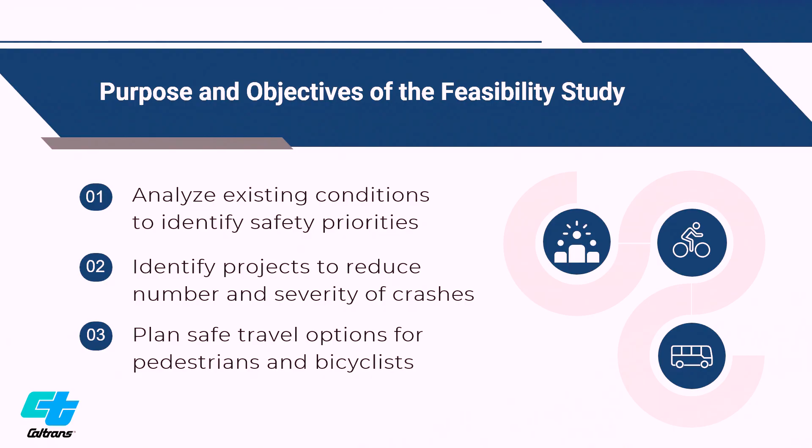The study area is the full length of PCH within Malibu, and we have done crash analysis. After we did a series of workshops, we've done some crash analysis because we want to understand what's going on out there. We can see from this that the highest number of crash factors is improper turns.

Speeding is a crash factor, and speeding is an issue across the board. For the many people we spoke with, speeding seems to be the number one thing everybody agrees upon, that we have to find a way to slow the cars down to a reasonable level out there.

Other violations include failure to yield, following too close, alcohol influence is another crash factor, something other than improper driving. As far as primary crash type, rear end is number one, then side swipe, broadside, somebody hitting an object, head-on crashes, auto hitting pedestrian, overturned, and some other things as well.

Looking at these crash factors, in some of the situations we are aware of, people are making U-turns in places that they shouldn't be making U-turns. Pedestrians park on one side of the street and cross to the other side. People pull out of side roads and turn left across traffic. People come to side roads and turn right where the visibility is poor.

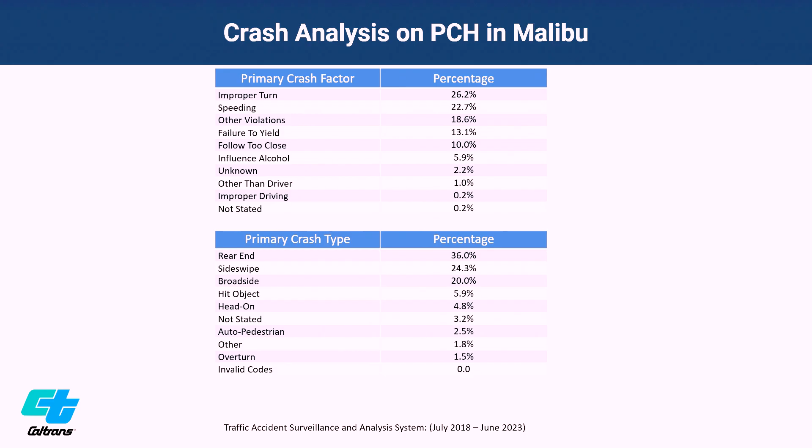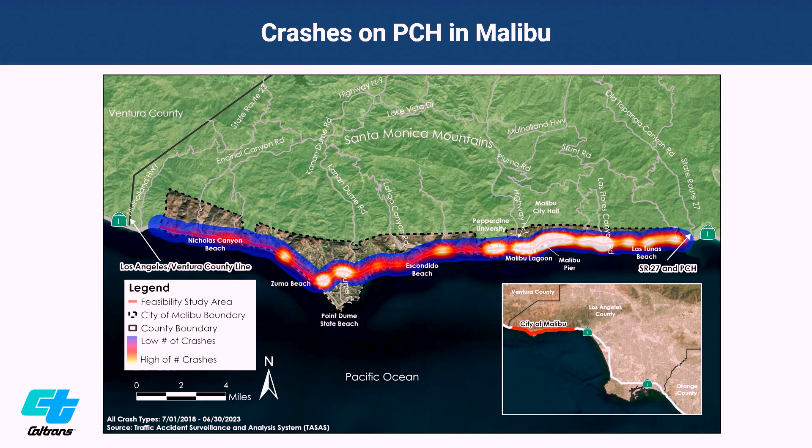This map kind of shows you the concentration. You see a lot of concentration out there, especially between Las Flores and all the way to the pier, but also some in the Kanan Dume, Heathercliff area, and quite a few down there by Bonsall and Westward Beach. So these are the areas that we understand need the most attention.

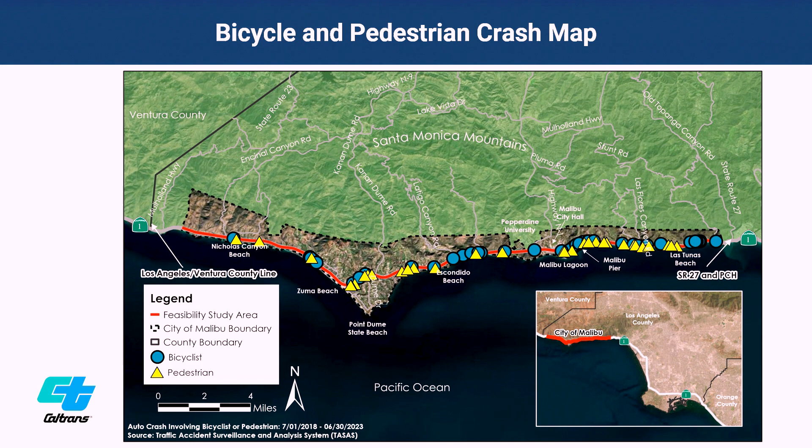We're looking at bicycle and pedestrian crashes and where those have occurred. So again, in order to make things safer, we need to understand the problem to apply the right remedy. And as far as our process goes, it's collecting information.

Engagement is what we're doing tonight, making sure that we understand what people, all the stakeholders, want. The analysis is ongoing, again this crash analysis. We've spent some time out in the field looking at the highway and looking at the conditions and what we might be able to do to help remedy some of that.

We're now developing project concepts, and that's what you're going to be doing tonight. So that's going to be really important. Then we'll come back later on, November, December-ish, with a draft report. So it's a pretty compressed timeline. But we're doing what we can, and tonight is, again, a really important milestone in how we move forward to the next step and prepare that draft and final study.

Our engagement has a four-pronged approach. We started off with the community charrette back in July 11th. We're doing these workshops, we have surveys online, which, by the way, this QR code takes you directly to, and an interactive website. We've also done a number of stakeholder meetings, and those have been really important as well.

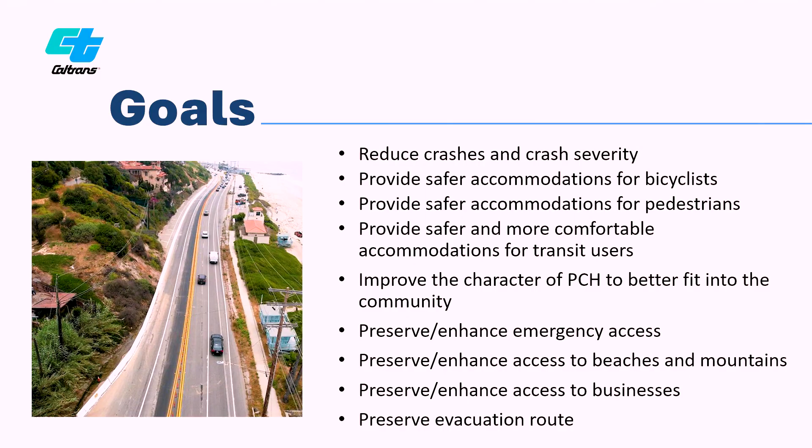Now, the next thing I want to talk about is the stakeholder meetings. These are the people we've met with - the local residents. As I go through these, I'd like you to raise your hand if you are one of these. Local residents - okay, a lot of you, most of you, local residents. City staff.

California Highway Patrol - thank you. Los Angeles County Sheriff - all right, thanks for coming. County Fire Department - anybody from the fire department make it today? Okay, Coastal Commission. Mountains Recreation and Conservancy Authority - okay, nobody there. Malibu Pacific Palisades Chamber of Commerce. Streets for All and Streets Are For Everyone - I don't see... oh okay, Damon, you made it.

Okay, these are all legitimate stakeholders, and they all have different perspectives on things. The sheriffs, CHP, fire department - they want emergency access. Mountains Recreation Conservancy Authority - they want parking on the beaches, near the highway, so people can get to the beaches and trailheads. Some people don't want parking. We need to find space for bike lanes and pedestrian access. That is not going to be easy to take all these things, and we've got limited space. This is all about budgeting space.

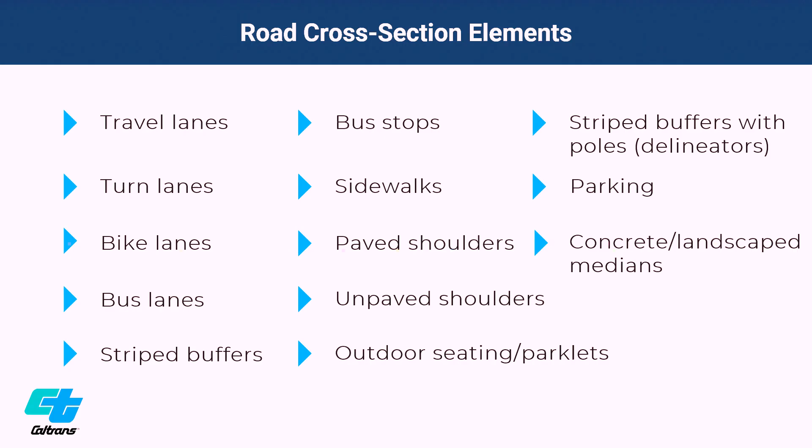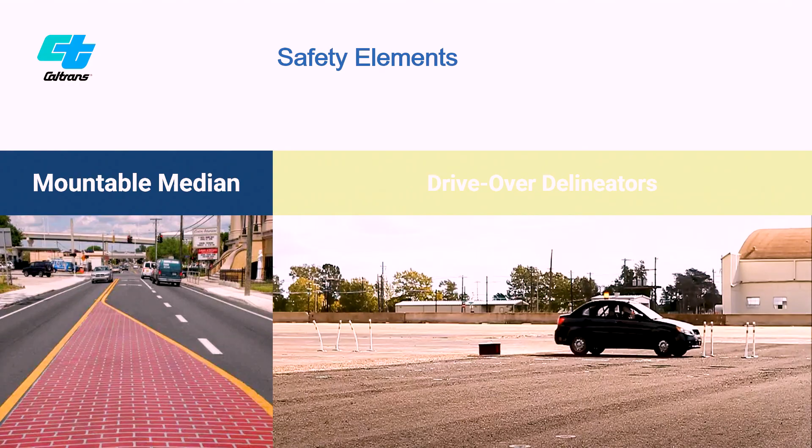One of the things we've been thinking about are medians. This has come up where we replace the turn lane in some places with a median and have U-turns upstream somewhere, so people can turn around if they need to access something on the other side. One thing we've looked at is a mountable median, so the fire department, sheriff, and CHP can still get through—maybe a median they can straddle. So we're looking at different options, and the median with the U-turn is a possible tool we could use in some places.

Now we're going to get into the cross sections, and I'm going to go through all of them. Then once we've gone through all of them, I'm going to have you come up and look at each of these tables with all these cross sections in them. So that's type 1 over there, 2, 3, 4, and 5.

This first type is 4 lanes, center turn lane, housing on both sides. There are different places that have this typology, but one that really exemplifies this is Las Flores Canyon Road to Carbon Canyon Road.

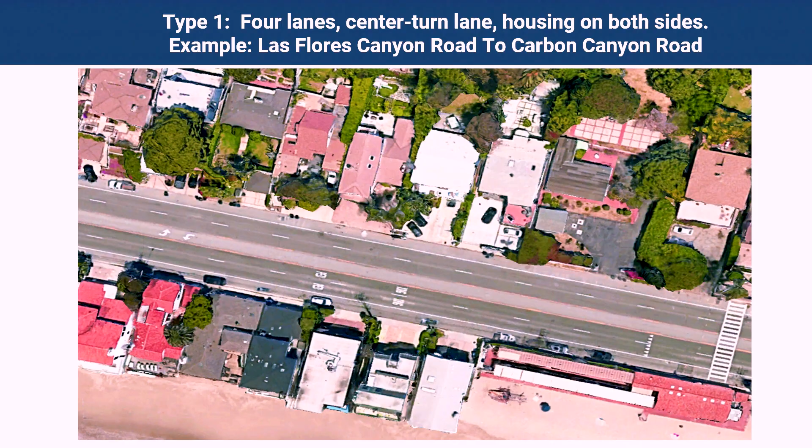By the way, when we did our survey and the workshop last time, we asked people some of these same questions—of all the cross-sectional elements, what do you want to preserve most? We see here on this stretch, and it was actually pretty similar on all the stretches...

Bike lanes came out number 1. Sidewalks or walking areas came out number 2. Bus stop improvements, number 3. Full or part-time bus lanes was next. Then replacing the center turn lane with legal U-turns at signalized intersections, then center medians. Parking on the beach side was later on, and maintain the same number of travel lanes ranked pretty low, as did parking on the mountainside. Keep the center turn lane ranked almost at the bottom.

Dead last was 'I want the highway to stay the same as it is now.' That is not what we heard many people at all say that they wanted. So this means we need to find some changes. Which of these cross sections best suits that?

So this first stretch again—housing on both sides, Carbon Canyon to Las Flores. This first possibility, and by the way these aren't the only possibilities, but these are some mixes that illustrate it. When you vote, you're going to tell us which of these you prefer, and you're going to rank them.

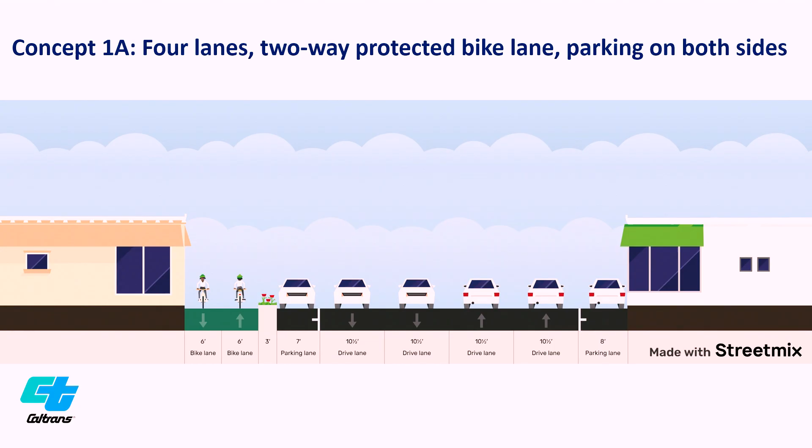Well, yes, so this would be two-way bike lane, and you see parking on both sides in this scenario. Right, so this one is parking on one side, same thing, and sidewalk on one side. Add sidewalk. Yes.

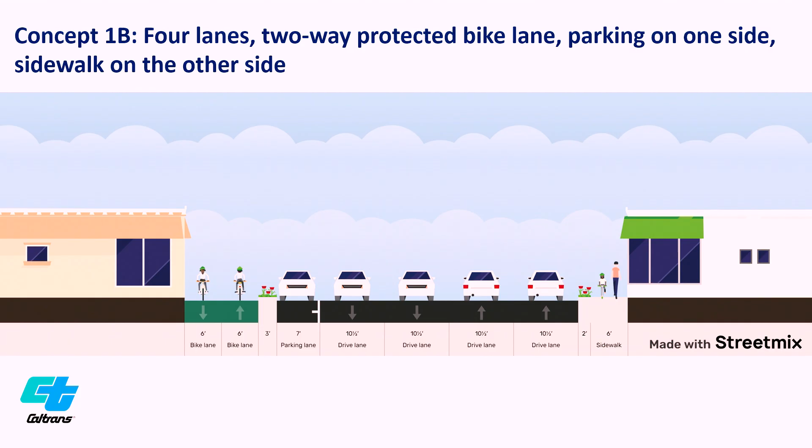Yeah, thank you, and I really appreciate you guys coming and struggling with this because we've all struggled with it for years. But when we look at your survey, the number one thing is bike lanes, and it's very clear that the bike lobby has taken over the survey. I've come to 2 city meetings from Rambla Pacifico today on the Coast Highway, this one and one previous. I saw one cyclist on the highway. There's a lot more on the weekends, they're recreational, yet they've skewed the results terribly. What do we have, 50, 60 people here, maybe 35 residents. They're going to feel very differently than what your survey says.

And one thing you didn't seem to have, that's critical, how are we going to narrow lanes in any of these options? Almost all of them. We need a median for emergency access, because if you narrow your lanes, you're going to have a lot more accidents, since people come to the beach on a weekend and, as one highway patrolman told me, they leave their mind behind.

I think maybe we're starting off wrong, starting with the survey that's skewed. Let me add one thought: what is mandatory? Mandatory is residents being able to access their house. Mandatory is not eliminating parking, because the Coastal Commission won't let us, we've fought that battle before. So if you start with that criteria, it is limited. And yet, as you pointed out, in different locations we can have different results.

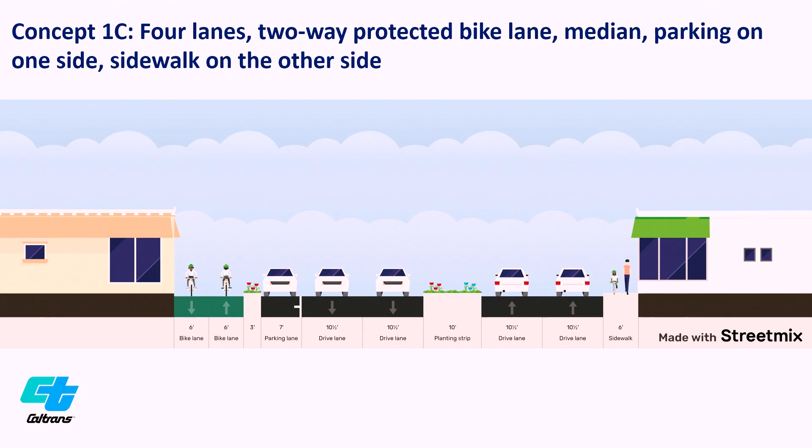So anyhow, here's another option with a median. This could be either planted or something that emergency access can drive on, and that's with a sidewalk. This is with the center turn lane, same thing.

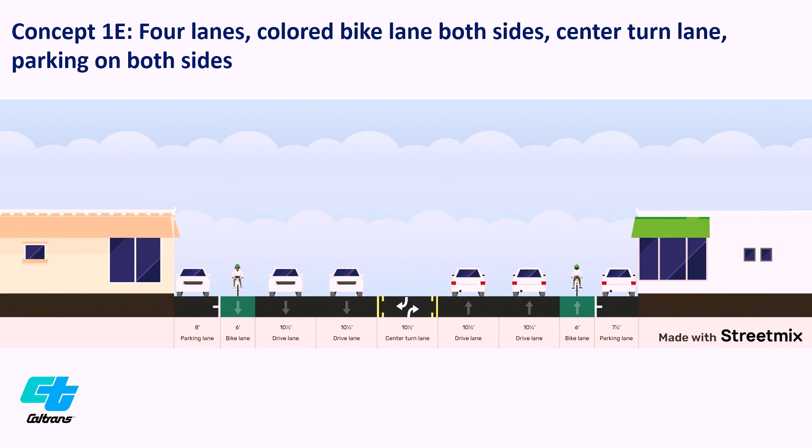Now here's one with parking on both sides and just regular bike lanes that are not protected. Maintains the median turn lane.

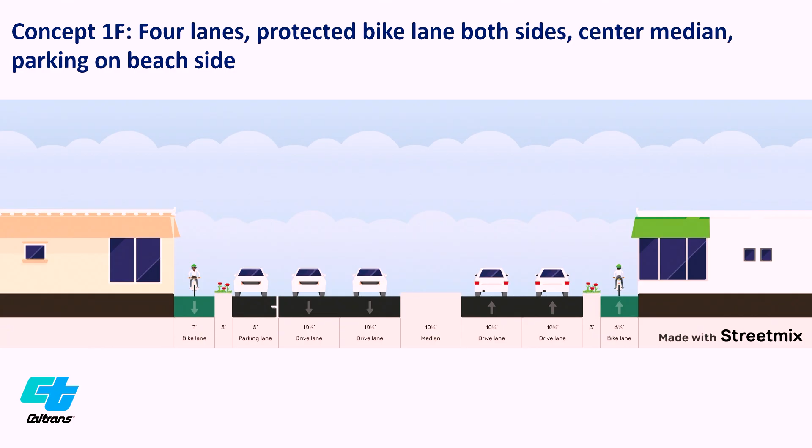Okay, so that's the first one, and that's up here. When you get ready to vote, you can come up and look at these. The second one is sort of the west end, this is no development on the mountainside, housing on the beach side.

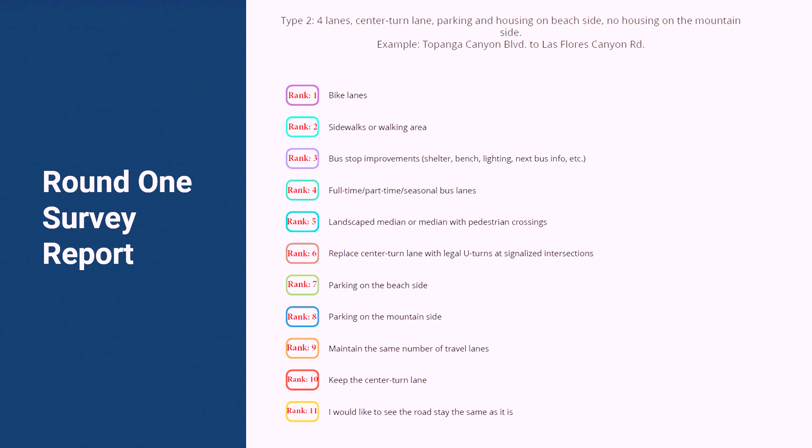I'm sorry, yeah, east end. Same kind of thing, pretty much the same results on the survey. And again, dead last, I want the road to stay the same as it is.

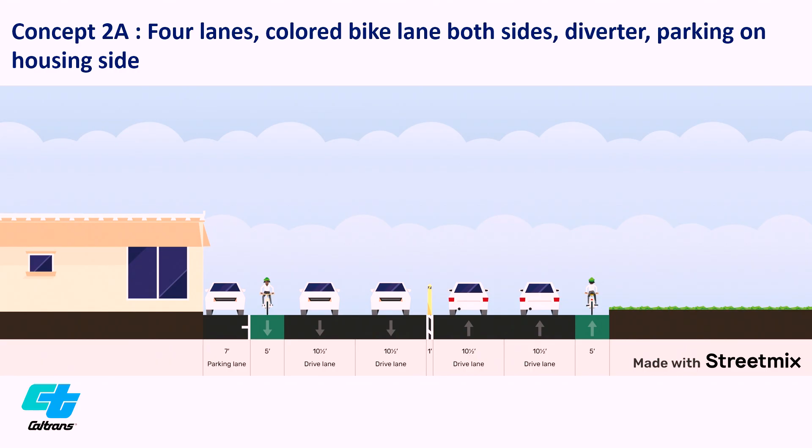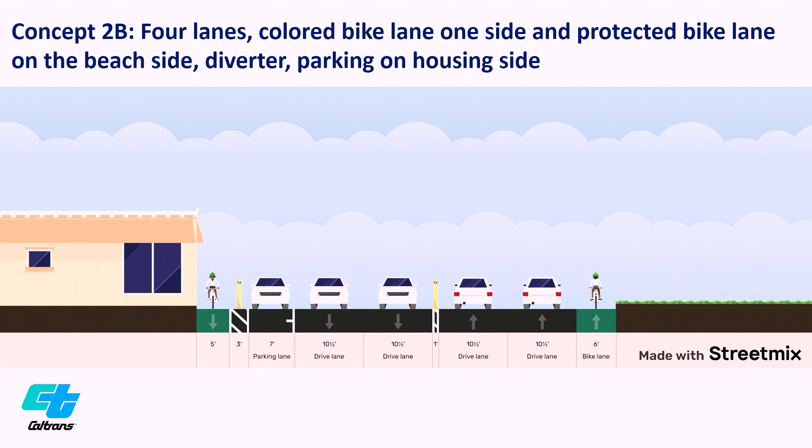Protected bike lane on the beach side, regular bike lane on the other side, no median.

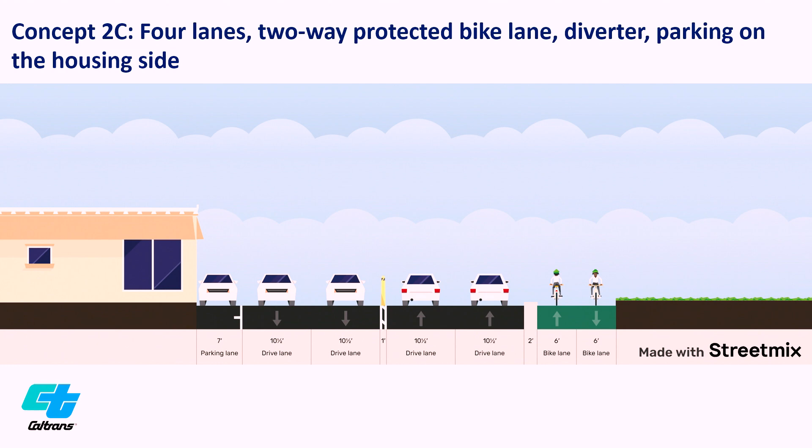And here's parking on the beach side, 4 lanes, 2-way bikeway on the mountain side. Let me get to it, yeah, it's 2 lanes, so it's bikes going this way and bikes going this way. It's 12 feet wide, similar to a bike path.

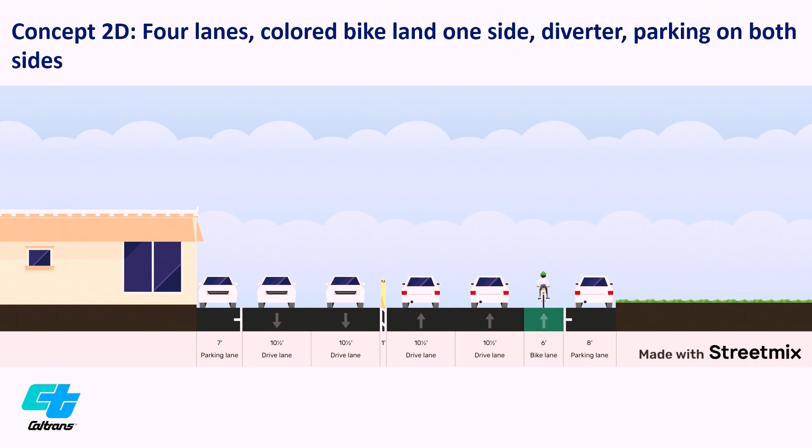So that's the kind of the center, what we've got out there in some places now, with the center paddles. Yeah, the paddle, you can't turn against them.

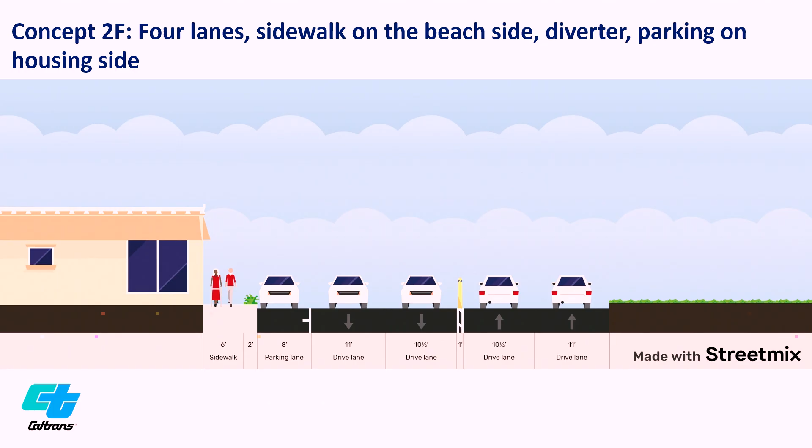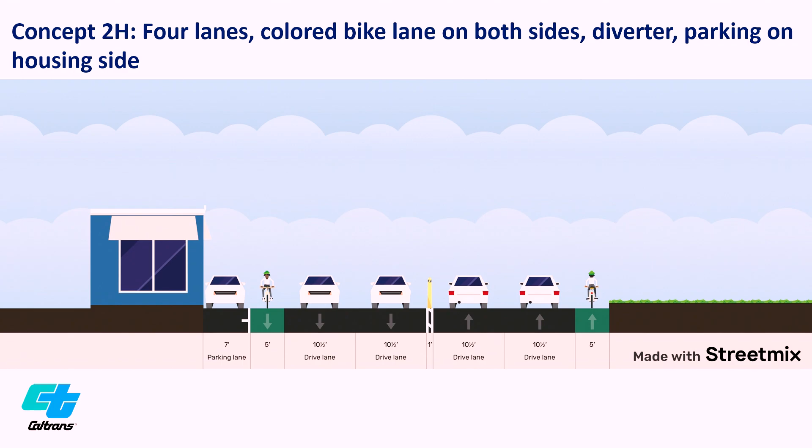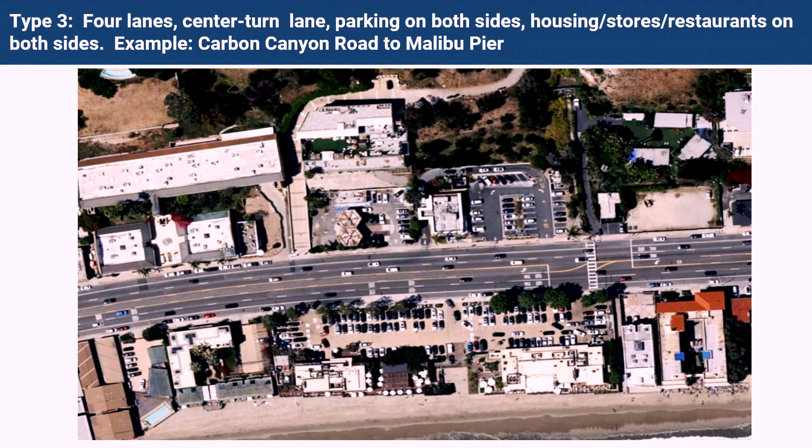So that's number 2. Typology number 3. This is the center part, the sort of center of the city. Commercial on both sides, housing on both sides, a lot of activity. Again, pretty much the same results on the survey. These really were the same for every one that we saw.

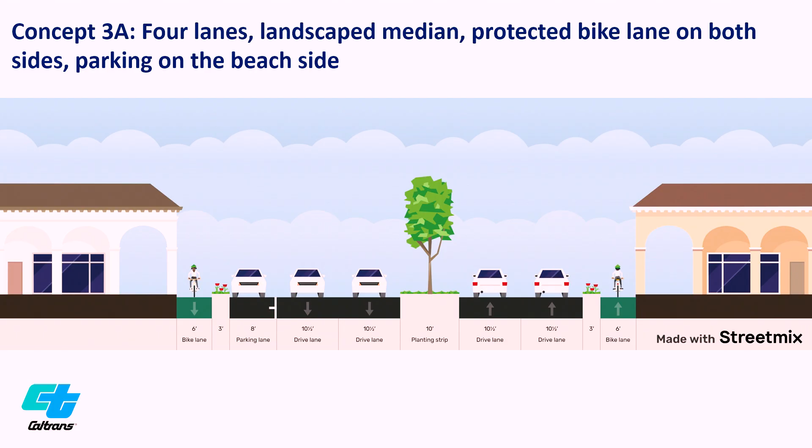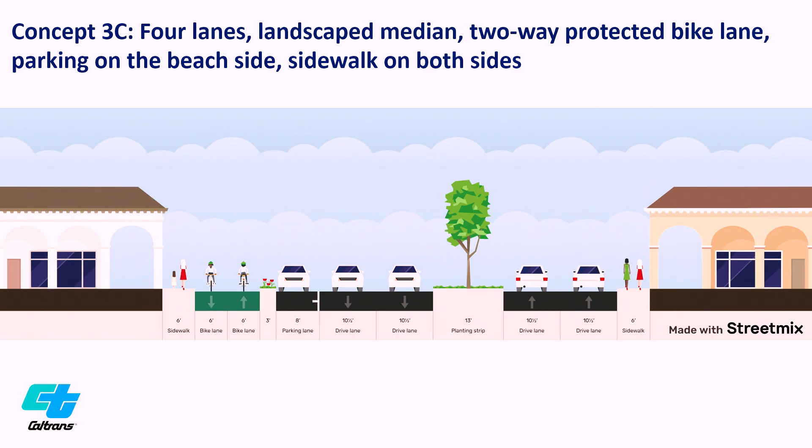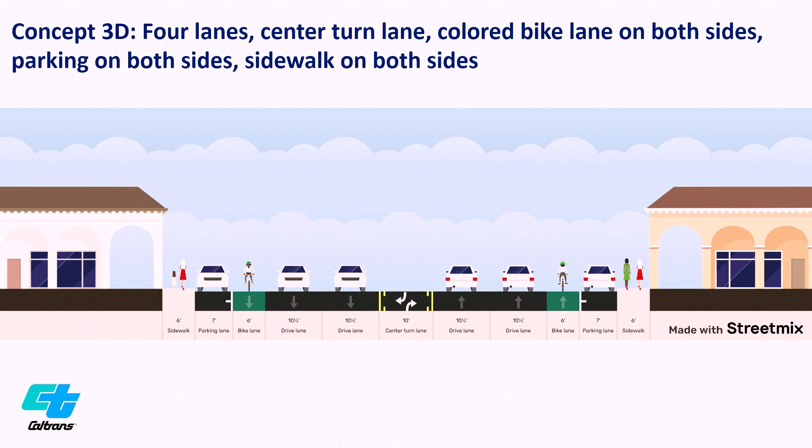A bike that's going one way gets to the next section, and now it's got to cross the road and go over to the other bike lane on the other side. Good point, so you can't look at these things in isolation. Right, there would be transition points where they would cross the road at a signalized intersection. So that's what we would have to do. We can put the infrastructure out there, and we have to do the best we can with that.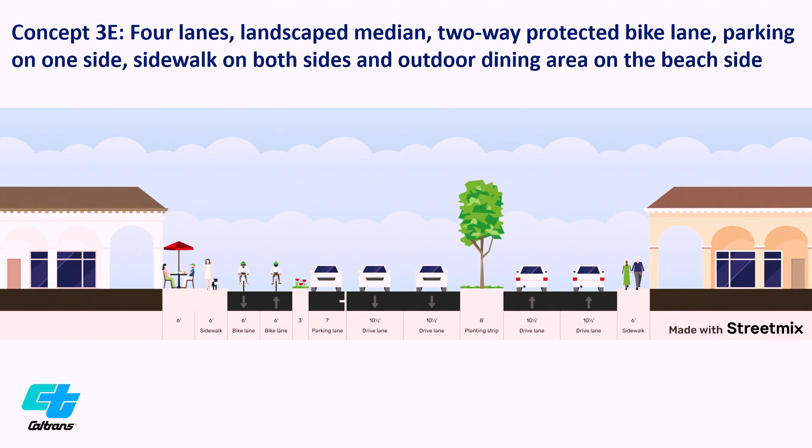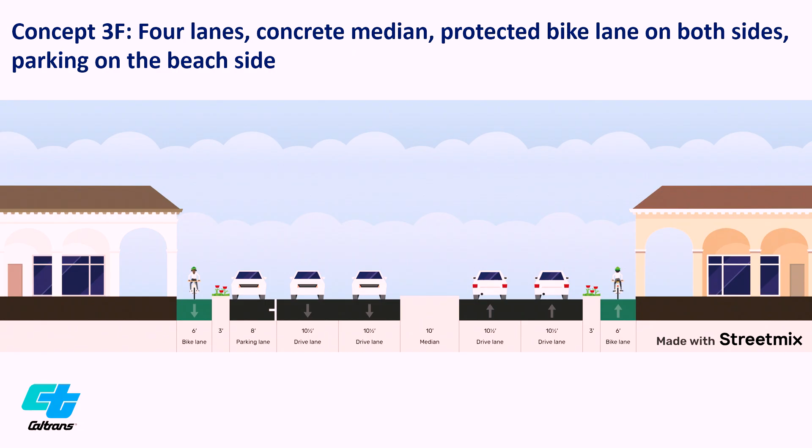So here's a landscape median, a little bit of outdoor dining, a little wider sidewalks on the beach side, and 2-way bike lanes on the beach side as well. And here is a median with no landscape, with emergency access available, and protected bike lanes both sides. And here is the landscape median, 2-way protected bike lanes, sidewalks on both sides.

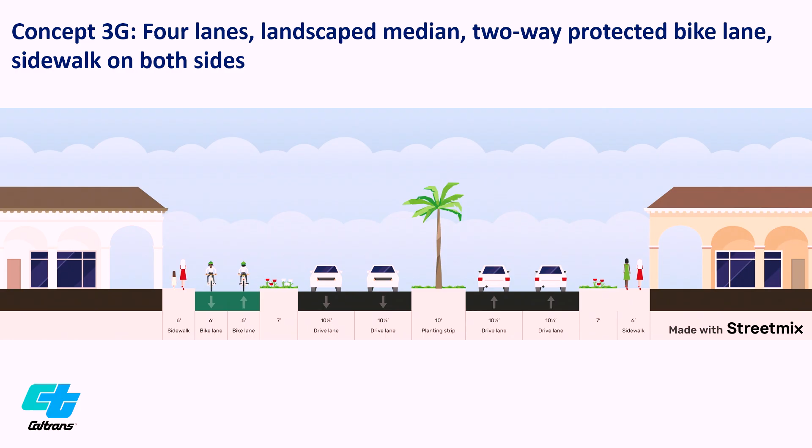I just want to show it is possible to have a really nice boulevard along a state highway. It's, I think, one of the best examples of a state highway going through a commercial area that really shows it can be feasible.

And here's what we asked in the survey. For the central part of Malibu, what is your preference? Do you want to create more of a boulevard character with features such as a gateway, median, landscape, wider sidewalks, and bike lanes to slow traffic? Or do you want to keep the segment the same as it is and keep traffic moving? 90% of our respondents said they want more of a boulevard atmosphere.

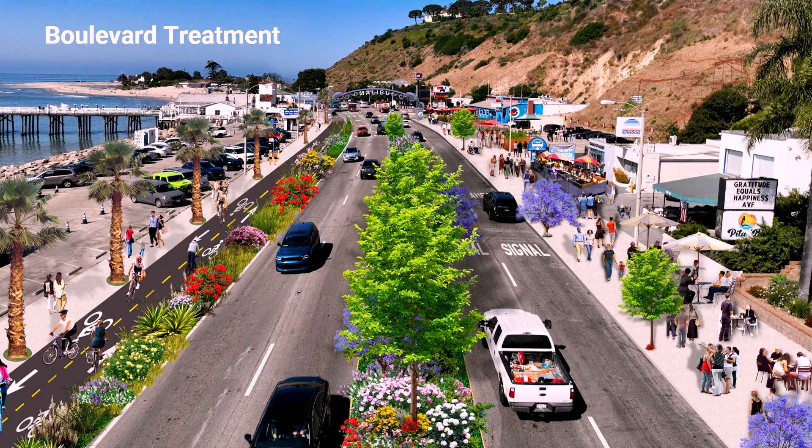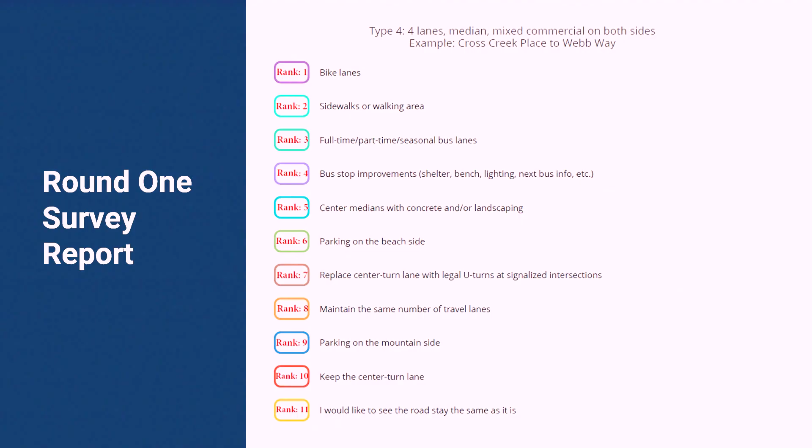So, okay, the fourth segment is Cross Creek to Webb Way. And we've only got a few options here. Again, same results on the survey. There's a lot of width here, we've got more width here to play with than any other stretch of the highway in Malibu. This is Cross Creek to Webb Way. So here's an option: wide median, bike lanes on both sides, two-way bike lane on one side, 4 lanes of traffic, parking. So it's an option to pretty much do most everything.

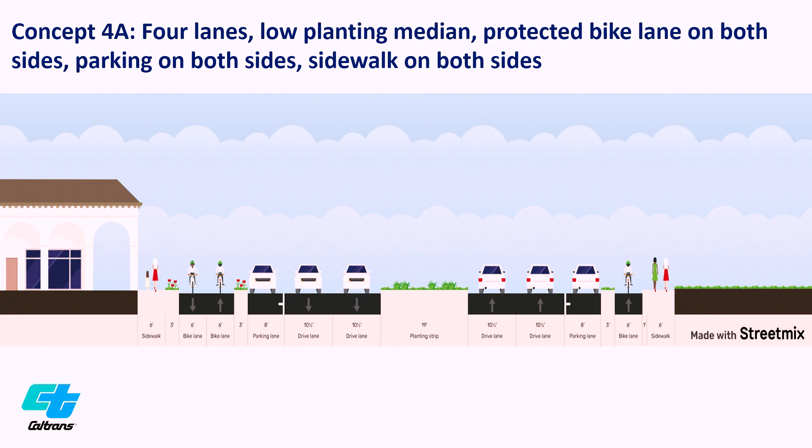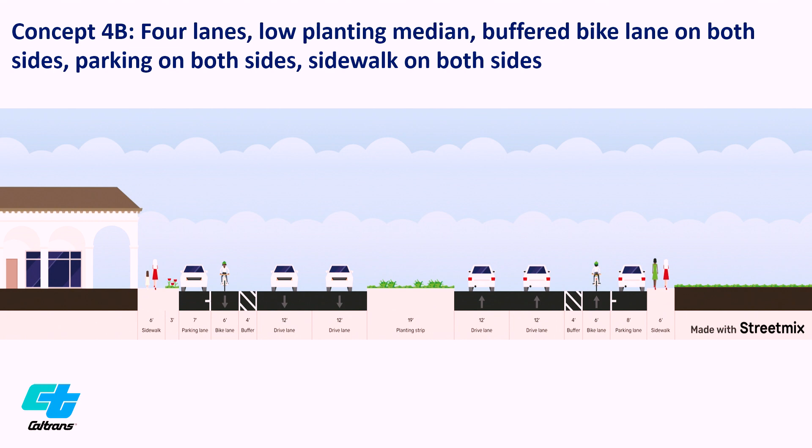Here's an option with the 4 lanes, parking both sides, and what we call buffered bike lanes that don't have physical barriers, but some width between the bike lane and the travel lane. And here's another one, protected bike lanes both sides, median, parking both sides. So this one is a lot easier to work with because we have more width to work with. And in this case, the emergency access could take place on the median.

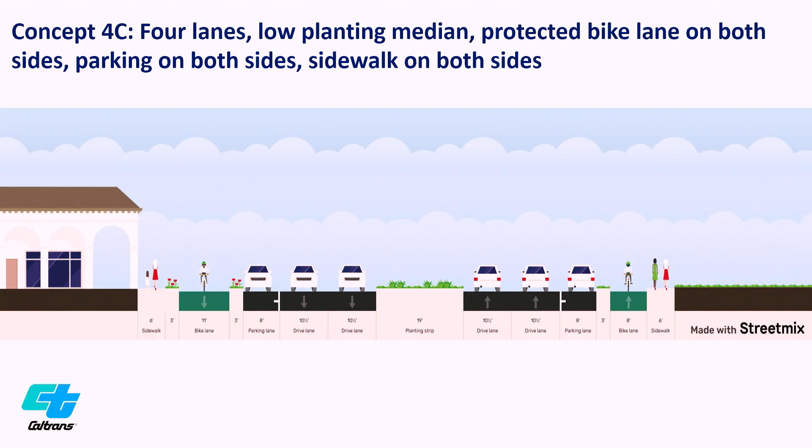And then our last prototype, or typology: no development on either side. 4 lane, center turn lane, parking both sides.

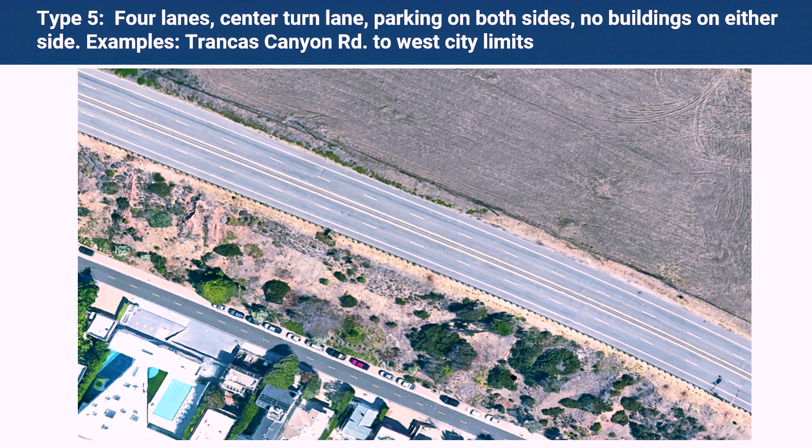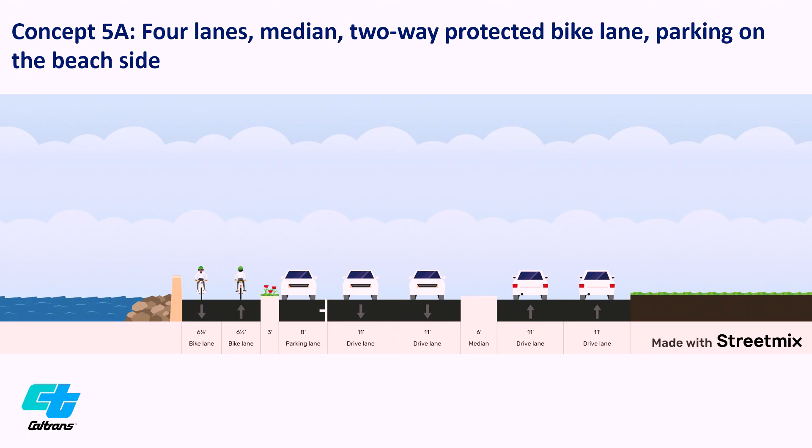This is one option: take 4 lanes of travel, parking on the beach side, 2-way bike lanes on the beach side, no parking on the mountain side. And this would have bike lanes in both directions.

Now this one would come down to 2 lanes. Once you get further west, traffic volumes come down quite a bit, and we have the option to come down to 1 lane in each direction. If we do that, it gives us a lot of possibilities.

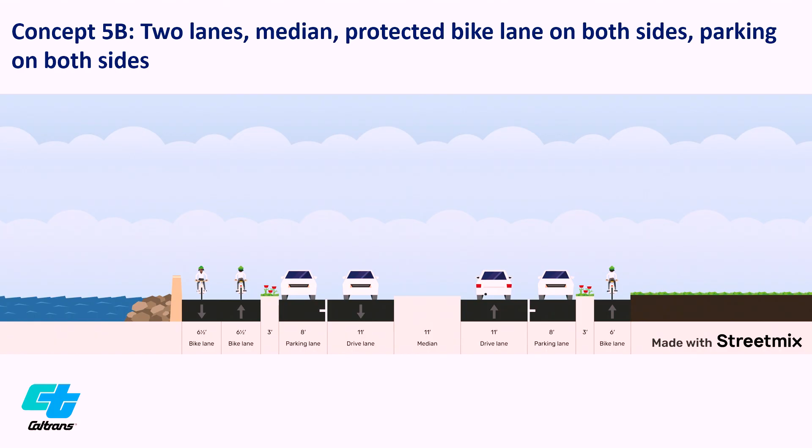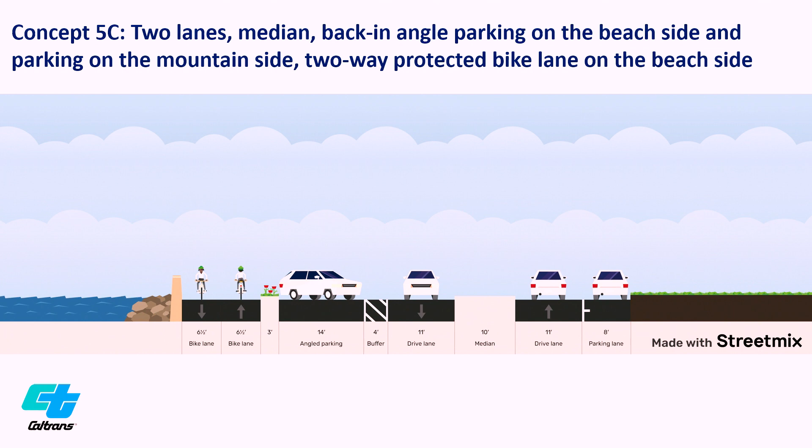So parking both sides, bike lanes both sides, and 2-way on the beach side. Here's another option, we'll talk about this more later on, but when you take away 2 lanes of travel, you've got space for other things. Like here we could add angled parking on the beach side and actually increase the amount of parking there. And then this one is parking beach side, bike lanes on both sides, 1 way.

So, we have not done a survey. We looked into doing surveys and we're told that it would be quite expensive and time consuming. At some point, we need to do that.

And if we have more land, more space, there's more things we can fit in and satisfy more people and meet more of our goals.

There is not a legal mandate, but Caltrans does have in its policies to provide that.

On the eastern end, it's in the 40 to 45,000 range per day. Per day. Oh, per year? Multiply that by 365, I don't know. We don't have counts of that. It would be good to have those.

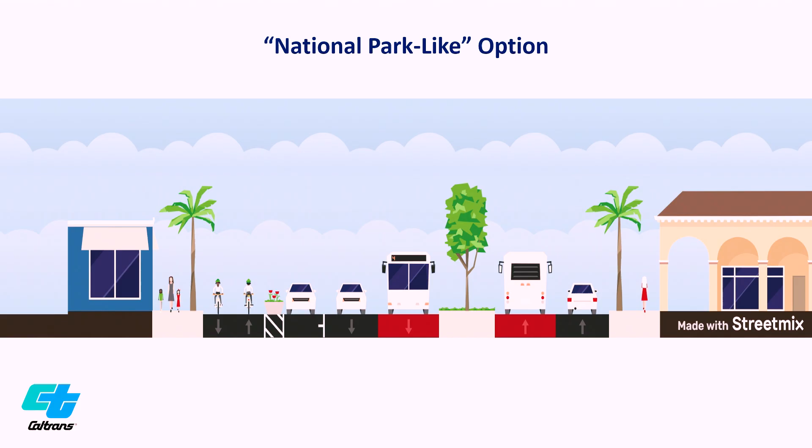This option is what we're calling the national park-like option. With this one, we treat it as if we're going through a national park. In some national parks you can only get there by bus. Here we're saying lots of buses, parking lots for people to park in, and less parking with this, but bus service treating the area like you're going through a national park. You slow down, you're more respectful of the environment, more respectful of the community. This option would have bus lanes — it could be done without them, but it would be more effective with bus lanes. It's a big picture thing that would take a while because we'd need adequate parking, and the biggest issue is finding operating expenses for the buses. It wouldn't be cheap to operate a lot of buses, but it's an option we're throwing out there, and we'd like your feedback.

If you could continue in the survey, it's the next question. I'll give you a minute to fill that out, in case you haven't already.

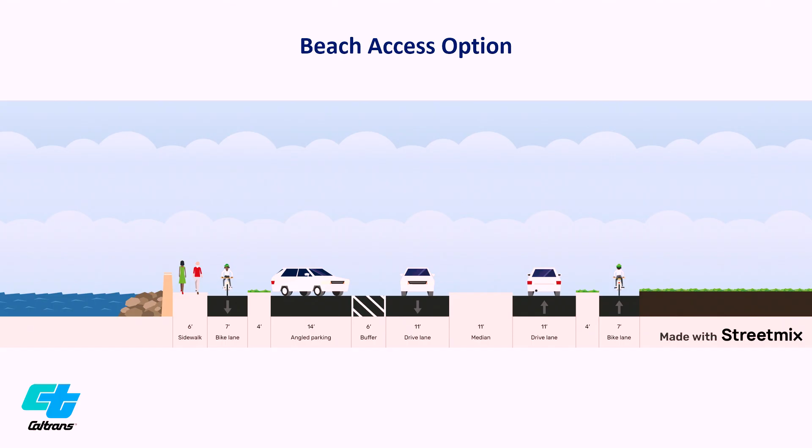Okay, so those are the main things we wanted you to vote on tonight. Moving on to some other topics — we've talked about cross sections, the linear part, but we also have to think about crossing the street, the highway, and intersections. Intersections have quite a few crashes as well, so how do we treat some of those? I want to show you the ones we've looked at and the direction we're headed. This is in order of the total number of crashes in the last 5 years: Bonsall, Las Flores, John Tyler, Webb Way — we'll go through each one of these.

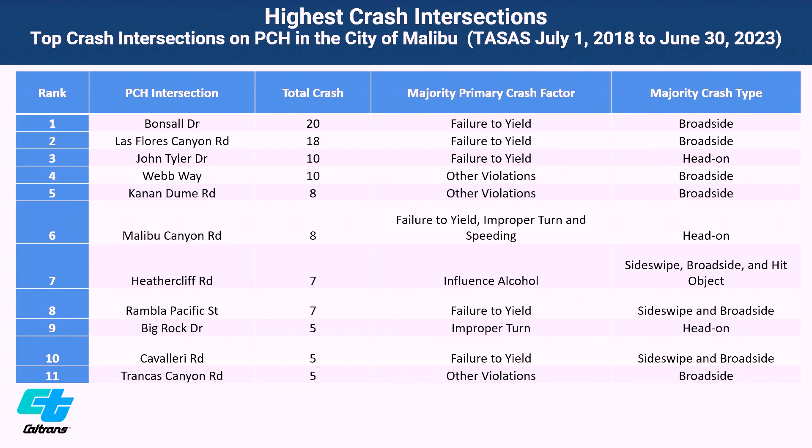We can see the crash types and the primary crash factor, failure to yield in a lot of them, broadside crash types. So we went out and visited each one of these and started to develop some concepts to make the changes.

So this is Bonsall, and we're kind of combining Bonsall with Westward Beach, that whole area. One of the issues is that people are turning left out of Bonsall. It is now right turn only, but there are people violating that. It isn't easy to see around the shrubbery there, the landscaping. So this was number one.

So some of the things we've talked about here, let me just finish this one and I'll get to you.

The 2015 traffic study that Caltrans and the city of Malibu did recommended solving this problem by putting in a new bridge to connect Westward Beach Road into the traffic light at Busch Drive. Why aren't you studying that? A new bridge from the traffic light at Busch Drive, the traffic light at Pacific Coast Highway at Busch Drive, just immediately west of this, extending across Zuma Creek to connect to Westward Beach Road and eliminating the intersection at Westward Beach Road at Pacific Coast Highway where there's that weird configuration you're talking about.

That should be studied. Okay, we can put it in our list. Please do, let's take note of that. We'll put it in our list. That was the conclusion in 2015, and it made a lot of sense. We worked very hard on that.

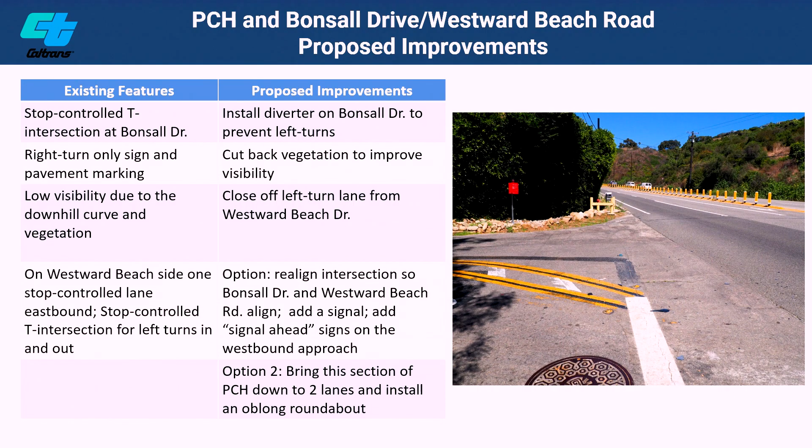We need to install a diverter so people can't turn left out of Bonsall, cut back the vegetation, close off the left turn lane from Westward Beach Road. But here's two options. Realign the intersections so that they meet one another and put a signal there. And the other one is to bring this section down to 2 lanes and install an oblong roundabout.

Yes, a lot cheaper than a bridge, a whole lot cheaper than a bridge. Well, you left turn by going around the roundabout.

Roundabouts, by the way, significantly reduce crashes. Because they eliminate conflicts. They reduce the severity of crashes when they do happen because people are going slower. And they actually have more capacity to handle traffic than, for example, a signal.

So, how do you get out of what? Well, you would use the roundabout. Going to have enough capacity. When we had the Woolsey fire, it was backed up.

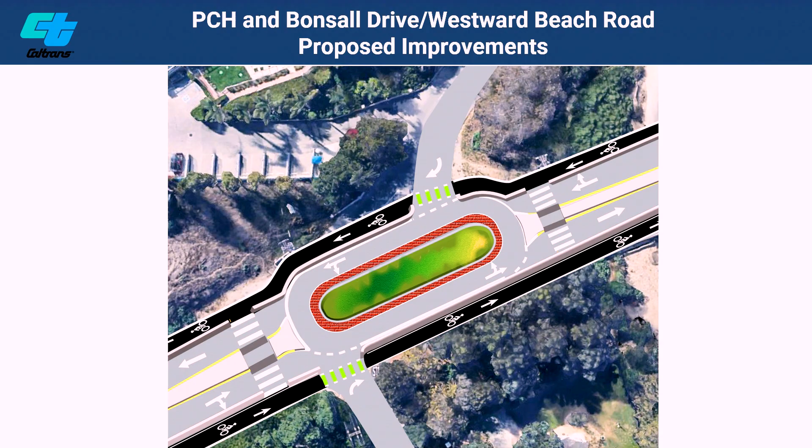I never left. Okay, so you're saying coming down from 4 lanes to 2. Correct. Yeah, it would slow things down coming out. But volumes here are lower than other places. So it's an option we're putting out there, and we want to hear your feedback.

So we've heard a bridge. How, what do you think of the roundabout? So you don't like the roundabout? Okay. All right.

Well, yeah, you're up. Tell us your concerns with this. I'll hit it all at one time. Okay, so we're doing specifically this one right now. Okay, so we're still doing, if you've got questions unrelated to this, we're going to hold those from when we finish this. Okay, very good. But if it's a question about this or a comment, we'd like to hear your thoughts. Yes.

Yeah, there's enough space, and you could do something, you could drive over the median. You could do Grasscrete, which is something similar to what you're talking about. So yes, that's something that could be done. Yes.

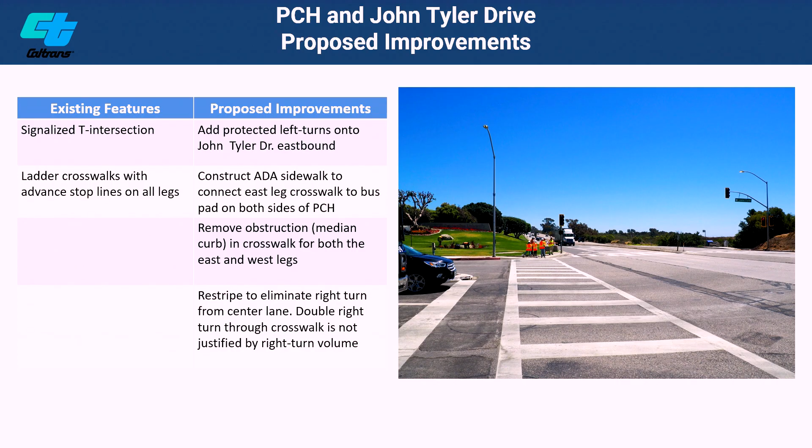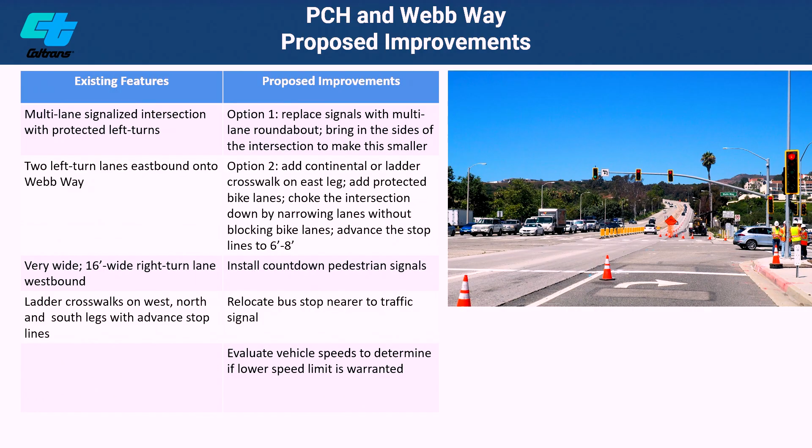Here's PCH and Webb Way. This is where we think replacing the signalized intersection with a multi-lane roundabout would make an enormous improvement. It would not only reduce crashes and crash severity, it would also create a lot—we'd gain a lot of space. There's a lot of turn lanes out there, but with roundabouts you don't need turn lanes. So we're also looking at simpler things: adding a crosswalk on the east leg, putting protected bike lanes through here since there's lots of extra space, putting countdown signals on the pedestrian signals—a few smaller things like that. But the big one would be, and that center thing, we can come back with a sample, but it would look kind of like this—a double lane roundabout.

Fender benders are better than fatalities, and people learn how to do it. But again, the question is: is this better than what we've got now? I'm just curious—does anybody have a reaction to this?

Okay. Yep. Yep. Okay. they have. Take the mic. Yeah. Yeah.

This is also an opportunity—if we had more time, the graphic artist would have put more in there. It's an opportunity to make a gateway out of this and put something really attractive in the middle, to make an entrance to this part of Malibu.

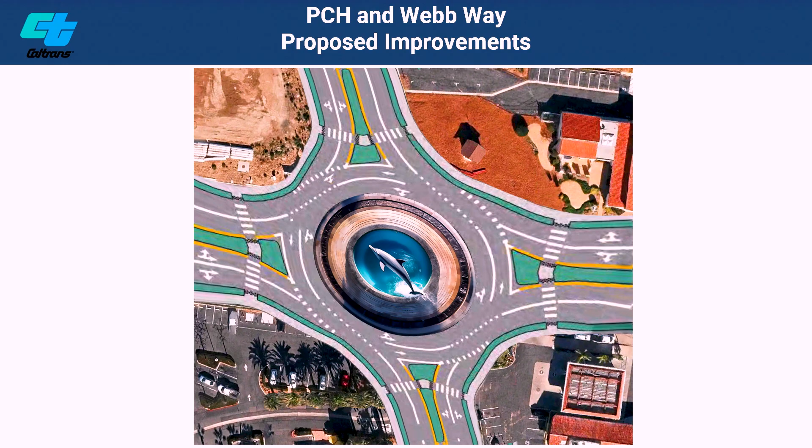Roundabouts move about 30% more cars than signalized intersections. Good question. They also don't need power, they reduce maintenance costs, and there's just a lot of advantages to roundabouts.

Any more comments on this? Well, it's 2 lanes in each direction.

It's been a while. Okay.

Kanan Dume Road intersection: prohibiting right turn on red is something worth considering, because there's a lot of people and the visibility is poor coming up to that intersection from the east. Also considering removing one of the right turn lanes, adding a crosswalk on the other side, moving the existing bus stop to a better place, putting a sidewalk to the bus stop, and maybe even putting a raised median in the double yellow areas.

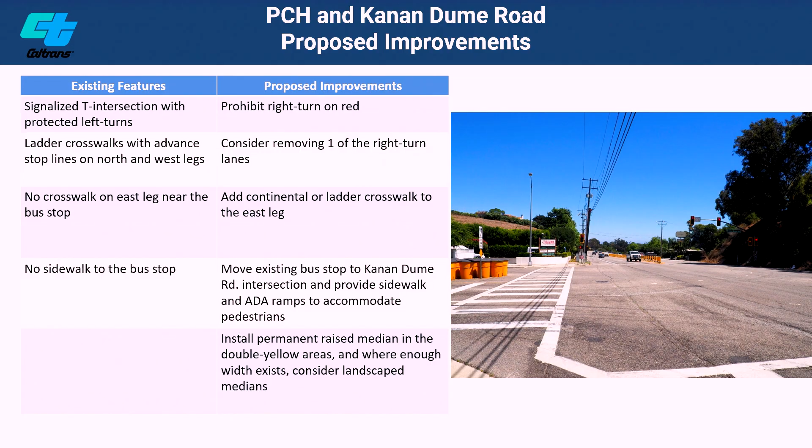If you're heading southbound or eastbound here, the signals are not aligned over the lanes. So if you're in the number 1 lane, it looks like you're looking at the turn lane signal. Good information.

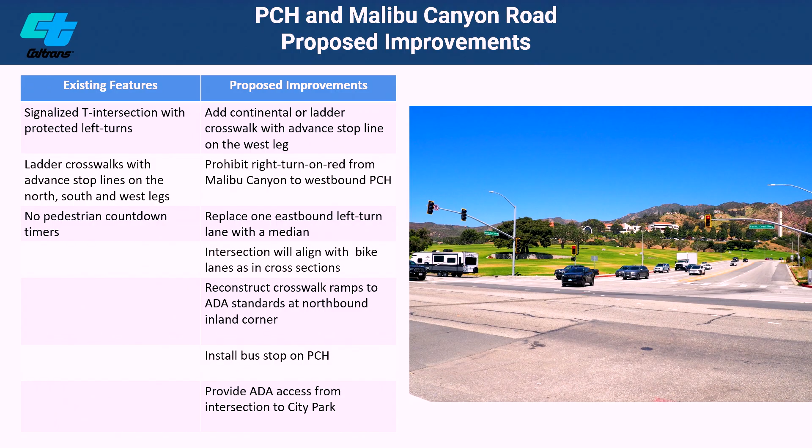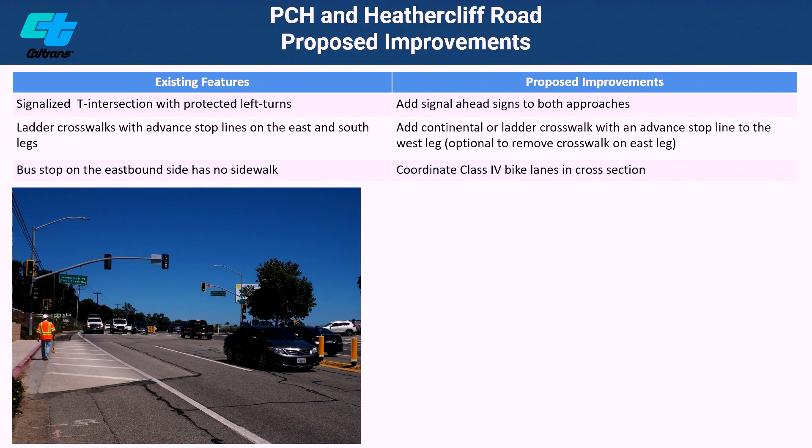Heathercliff Road: signal ahead signs to both approaches, moving or adding a crosswalk to the west leg, and again coordinating bike lanes in the cross section here. It's pretty wide out there and people are speeding.

Now here's another complicated one. We had crashes at Las Flores and we had crashes at Rambla Pacifico. We decided this is one location that needs some attention. Las Flores, I think, this location together is the worst.

There are two signals close to one another, and people are speeding through both of them. One idea is to change the timing so that you're going to hit at least one of the red lights. You're not going to be able to speed through both of them.

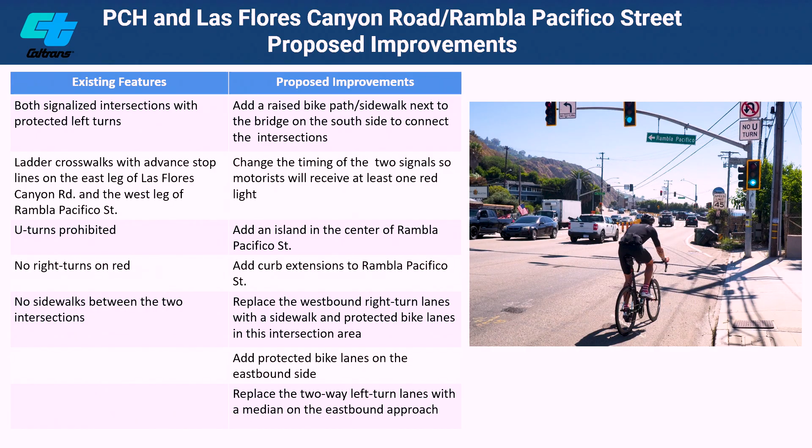The other suggestions involve a lot of modification to this intersection. We've added a lot of concrete to narrow things down, put in a median on the west side, replaced part of the turn lane with a median, narrowed the turns in and out of both streets with some curb extensions, and put a median island at Rambla Pacifico, since people are speeding right across there and going into the parking lot.

And then with protected bike lanes here, we're narrowing the feel of it with some concrete. There's a lot of different places we're trying to slow this whole intersection down by adding islands and that sort of thing, in addition to the signal changing.

The 2015 Caltrans study had a solution for this, and I think it should be at least studied. It involves another bridge, relocating Rambla Pacifico into Las Flores Canyon Road up the canyon. That means another bridge and another ramp, but it would eliminate the double traffic signal. Caltrans at that time told us the Las Flores Creek Bridge was not sufficient to carry enough water underneath the highway, and that it needed to be rebuilt and raised. That's actually another project being looked at right now.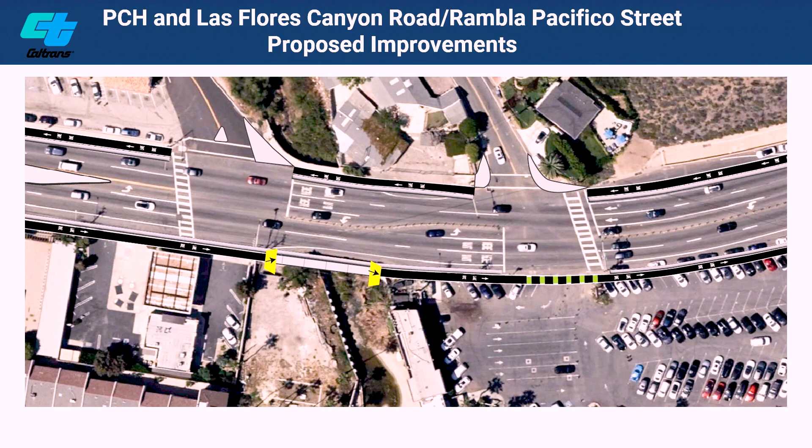Okay, other comments on this? This is a big one. All right, Big Rock. We didn't see a whole lot we could do out there besides prohibiting right turn on red, because visibility is not good there at all. We could add overhead warning signs and install a vehicle head on the 1A pole at the northeast corner of the intersection, construct a raised median east of the intersection for about 150 feet, or a median that allows emergency access. We could also construct a median where the double yellow line exists, in the left turn area, providing landscape pockets to obtain limited traffic calming. So some things to look at there.

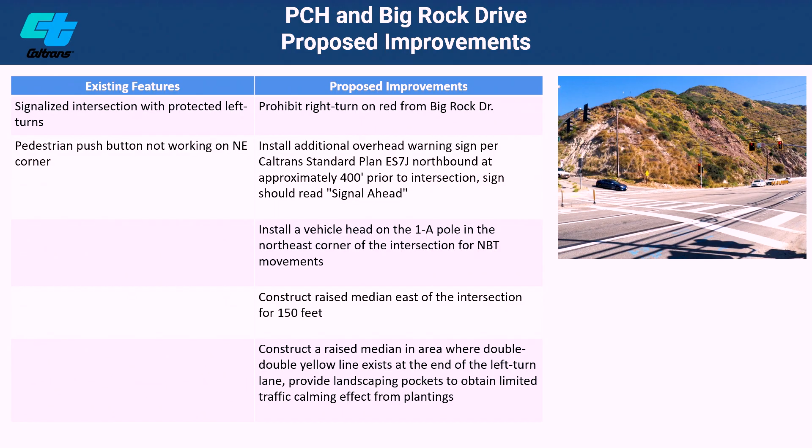Cavalleri Road, big issue with people turning out of here and making left turns. So putting delineators in the middle to prevent left turns, or consider preventing left turns altogether. And again, there's a sight issue, so trimming some of the landscaping.

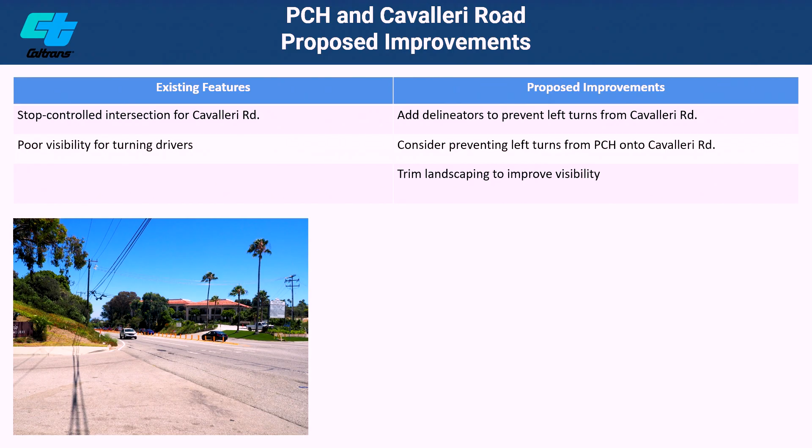And then at Trancas Canyon, a ladder or continental crosswalk with an advanced stop line, just adding a crosswalk, and a concrete median where the median is less than 10 feet wide. Here's another place to consider replacing the traffic signal with a roundabout if we can get down to one lane here. So this is another place we could do a roundabout.

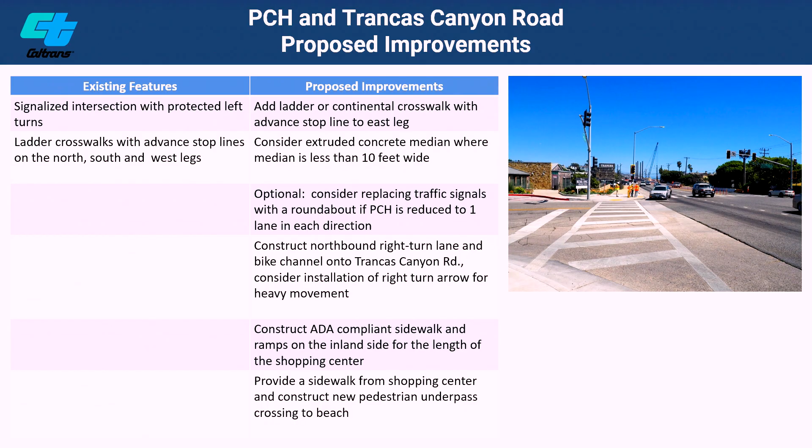Northbound right turn lane and bike lane to channel onto Trancas Road. Installation of a right turn arrow, ADA improvements, and provide a sidewalk from the shopping center, and construct a new pedestrian underpass crossing to the beach. That's something that I think is being done now.

So, El Matador access - this is another one that sort of mirrors what we have in more than one location. We could say El Matador, could be El Pescador, could be La Piedra, and other places along there where we don't have signals or stop control. If we can come down to one lane here, put a roundabout in.

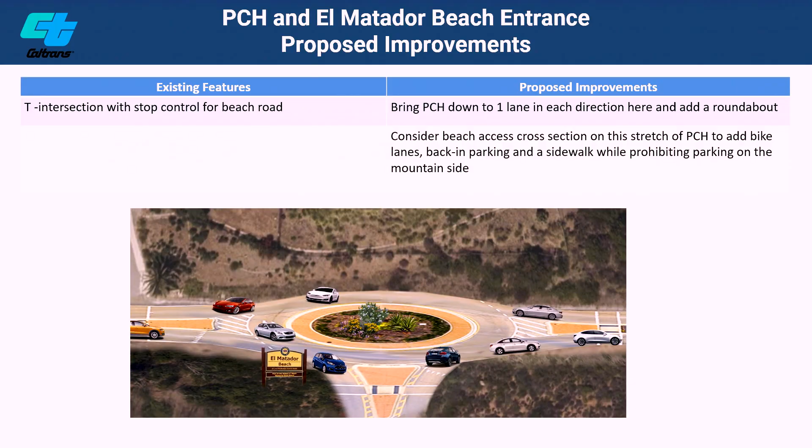This would significantly improve the safety of this type of intersection. Okay, before I get into a few global improvements, and we're getting close to the end here, any questions about any of those intersections I just showed?

Variation would be on the numbers, on the flow. That area is where we have some of the highest volume, in the 40,000s. True, it'd be tough to come down to 2 lanes. Normally we say 20,000 is kind of the cutoff - if we're below 20,000, we can get by with 2 lanes. If we have roundabouts, because they have more capacity, maybe we can bump that up to 25,000 or so.

Has anybody ever done a roundabout hybrid, like the Golden Gate Bridge, where you move your lanes - 2 lanes in when everyone's coming in on Saturday morning? Reversible lanes have been done, and they work where you have a strong directional bias at different parts of the day - maybe everybody's going in the morning and coming out in the afternoon. I'm not sure that's what PCH has on a hot weekend. On holiday weekends during the summer months, say from May to September, you do have that exact scenario - strong directional bias, Saturday and Sunday, huge directional bias.

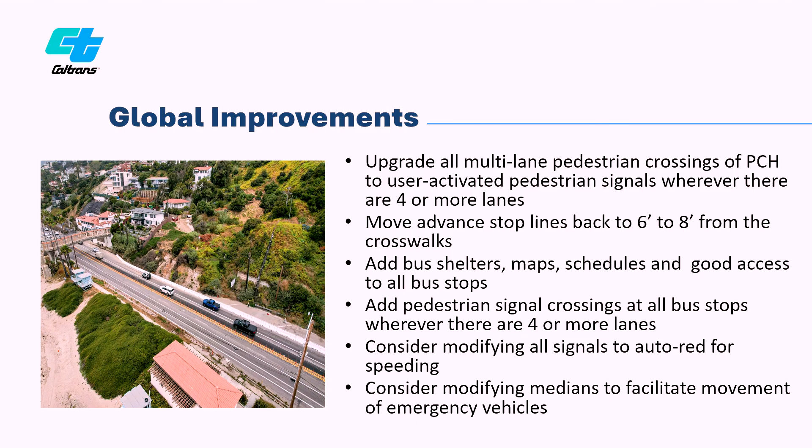On the intersections, by the way, yes absolutely, you should have - and Rob's already working on it - those speed-sensitive red lights. Later at night especially, I know you tend to have people who will just blow through intersections regardless of the light, so you might want to explore also including automated red light cameras for those particular intersections.

Let me throw another question out there, and this is out of the box. In places like between Las Flores and Carbon, what if we added more signalized crosswalks, with speed-sensitive signals in them? It would be a way of slowing traffic down in that area where people are speeding, and it's not easy to slow people down there.

They see a red light? No, this would be a full signal, pedestrian activated.

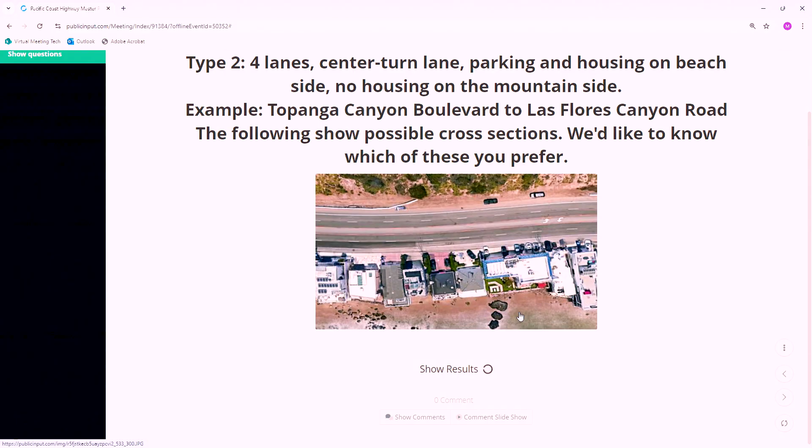Right, yeah. Right, right. Well, would you rather not see the results? Okay, so we don't need to see the results right now. Okay, are there more comments and questions? Scott?

On the survey, I think it could be extremely valuable if you could reach out - I don't know if you have the contact information - like the previous charrette had 3 times as many people here, probably, easily. Oh yeah, we're going to send notice of this out. Yeah, and I don't know if there's a way to get the message out even broader than that, just people that go to the City of Malibu website. Well, we did have an offer from the county supervisor's office to notify people. But I think if you were to get in the 1,000 people range or something like that, you might be able to get results that are - that would be great if we could. Yeah, it's obviously just a means of trying to figure out how to get people to see it.

I would like to invite all the Caltrans folks out to Malibu this coming weekend, and I think you will learn all of the problems that we have. It's going to be horrendous. Yeah, like I said, I spend a lot of time out this way and I'm pretty aware. I've seen it.

Parking is so close to the lane. I've seen people get out with their little kids, open the doors, and they're in the lane. Well, just east of Carbon, that's what these cross sections are about. It's a cross sectional element. We've got so much width to allocate, and that needs to be done quickly.